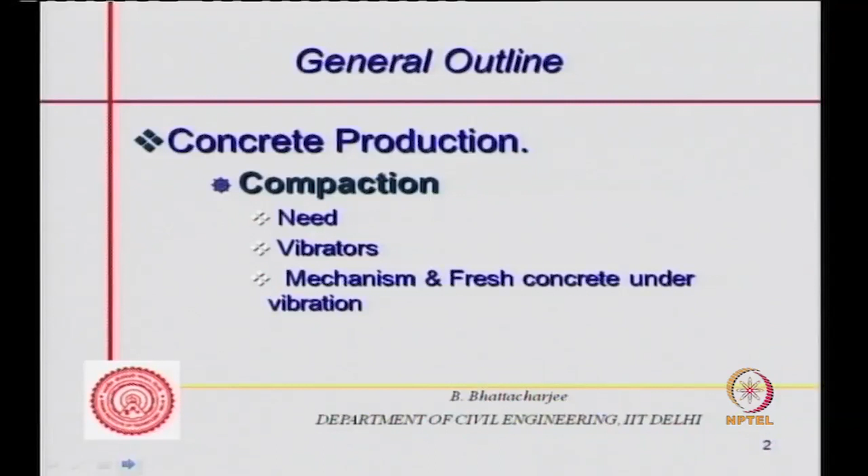So far, we have looked into issues of fresh concrete and the production process. In this last lecture of the module, we look at two important aspects of handling fresh concrete: compaction and curing of concrete. First we talk about compaction - why you need it at all. Then generally we use vibrators, so something about the vibrators themselves. Then the mechanism of fresh concrete under vibration, since we have discussed quite a bit of it elsewhere earlier. Then we'll talk about execution of vibration again briefly. And lastly, we'll talk about curing, need and method.

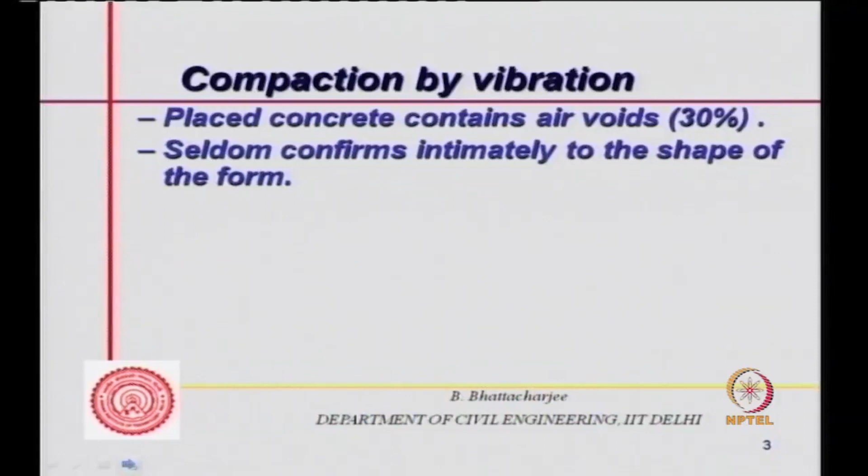So let's talk about compaction, which you usually achieve by vibration. I mentioned earlier that placed concrete contains air voids up to 30%, if it is dry concrete - we are not talking about highly flowing or self-compacting concrete. Also, it seldom conforms to the shape of the form. Therefore compaction is required to drive the entrapped air out, to densify the concrete, and also to increase homogeneity and uniformity. This has other benefits, but largely the entrapped air has to be driven out and concrete must be densified. So that's why we need vibration.

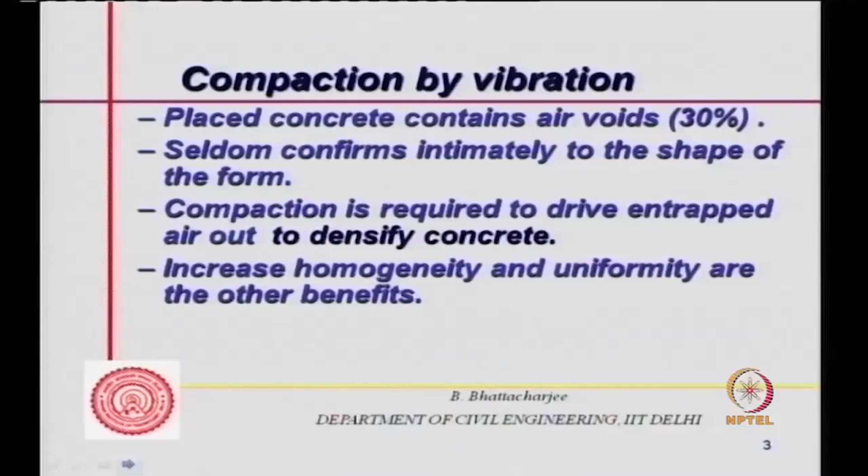This compaction is achieved by vibration, as we mentioned earlier. Energy for compaction is supplied through oscillatory motion of vibration, which is nearly simple harmonic motion. We can measure the frequency of such vibration in air, but it's difficult to measure within concrete, though it's more relevant if we can measure the amplitude of this vibration.

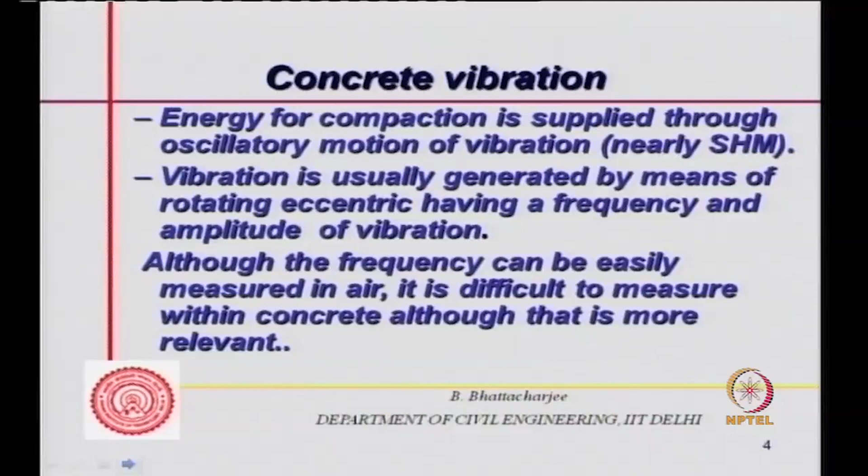So the energy of compaction is supplied through oscillatory motion of vibration, generated by means of a rotating eccentric having a frequency and amplitude. Essentially all types of vibrators, in some kind, are basically a moving eccentric having frequency and amplitude that generates the vibration, and this oscillatory simple harmonic motion causes air to drive out. We'll look into the mechanism. We can determine the frequency of the vibrating machine in air, but within concrete it's difficult, because of the effect of damping and other interactions between the vibrating component and the concrete.

We generally have two types of vibrator classification: internal vibrator and external vibrator. Internal vibrators themselves are classified into three types. We will not discuss all of them since it's not a course on machines, but the most commonly used internal vibrator is the flexible shaft type. The other one is a vibrating machine where the motor is handheld, and power is transmitted straight away to the vibrating component.

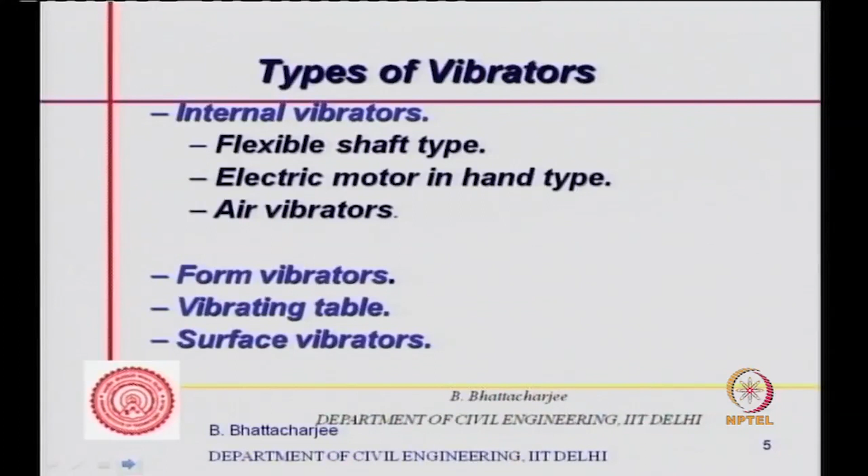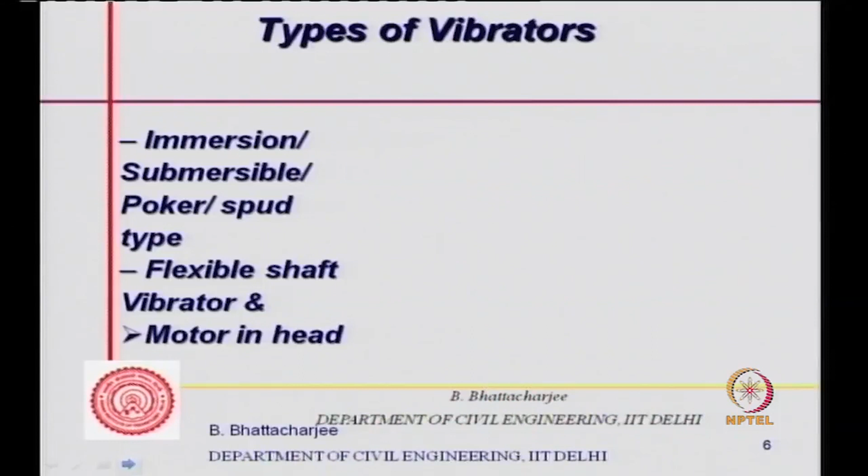So let us see what they are. There are surface vibrators used for floors, vibrating screeds etc., for floors or flat surfaces like slabs. The immersion type is the most common vibrator, also called immersion vibrator, submersible poker, or spud type. They have a flexible shaft, and there's also the motor-in-head type. Let us see quickly how they look - there are three types.

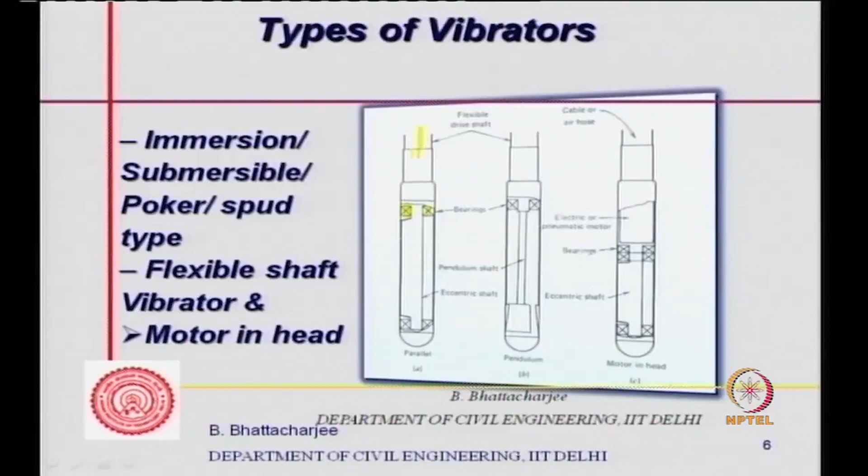For example, you can have a bearing here, and a flexible drive shaft, which is normally a spring that can rotate. The shaft itself is a spring that rotates, connected to a motor, with bearings, and then there's the eccentric mass or eccentric shaft. There's a bearing here, and this rotates eccentrically, causing circular oscillatory motion, and the concrete surrounding it is subjected to this oscillatory motion of the vibrator, which pushes the concrete somewhat and then releases it. So there's a kind of compression of the concrete, and then a kind of rarefaction, because this moves in simple harmonic motion. So this is one type.

The second type is the pendulum type, where the mass is here.

The flexible shaft is here, which is actually a spring. It's connected to the bearing, but there's a rod. There is again a pendulum shaft. Now this pendulum shaft is connected to the eccentric mass, and this eccentric mass causes oscillatory motion.

This rotates and causes oscillatory motion of the vibrating needle that is there. So these are also called poker vibrator, needle vibrator. They have all flexible shaft, and here the motor is. Electric or pneumatic motor is straight away here. So motor is here, with cable or hose.

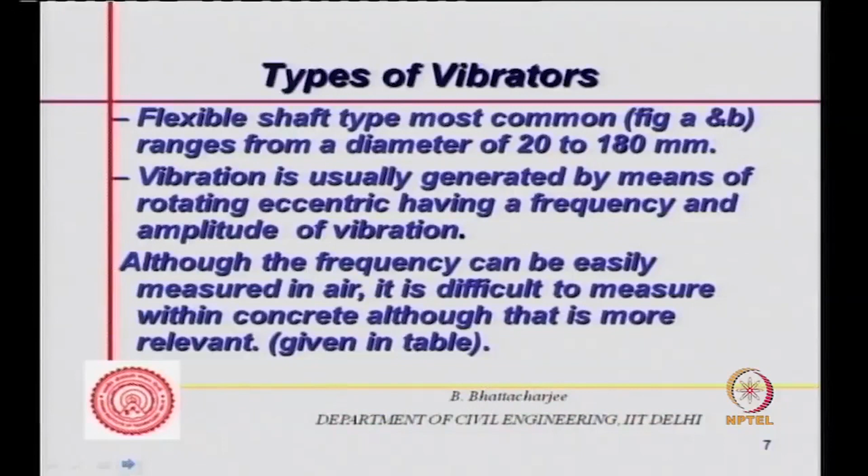This flexible shaft type is the most common, and its diameter can range from 20 millimeters to about 180 millimeters. Usually vibration is generated by means of a rotating eccentric, having frequency and amplitude of vibration, and this data is available.

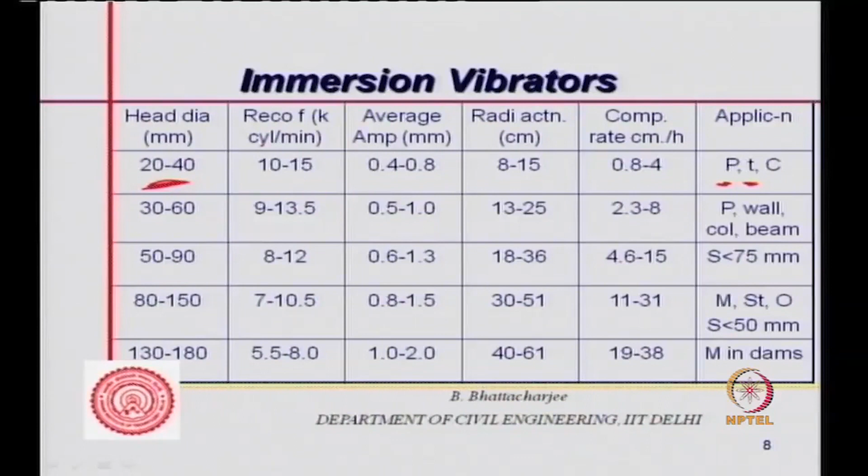So dimensions are from 20 to 80, up to 180. Now we can look at the head diameter of this needle, 20 to 40 mm. Where will you be using this? Plastic concrete, thin section. This will be used in plastic concrete. P stands for plastic, T stands for thin section, and congested reinforcement.

So here I have letters: P stands for plastic, T stands for thin section, and C stands for congested reinforcement.

So you see, thin head diameter 20 to 40 mm. 20 mm is used in thin sections, for example the web of a box section, a thin web about 100 or 150 mm thick, with a lot of reinforcement plus a pre-stressing cable passing through. So it's a thin section. Now the concrete has to be plastic, because if it's dry concrete, you will not be using this.

Now recommended frequency, in kilocycles per minute, is given as 10 to 15,000. And you can see as the diameter increases, frequency reduces. So this is high frequency, this is lower frequency.

Average amplitude is low here, average amplitude is high here. So average amplitude is high, frequency will be low; average amplitude is low, frequency is generally higher. So radius of action is 8 to 15 centimeters. In this one, radius of action is much more.

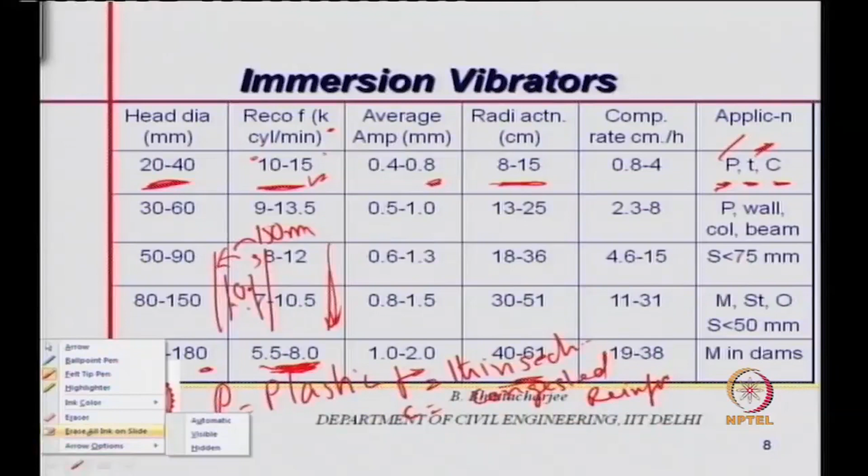So where you have a thin section, plastic concrete, congested reinforcement, you might use this. While this might be used in mass concrete, you can see its radius of operation is quite high, and compaction rate is also fairly high.

So where you have large mass concrete, you want to vibrate it, you might use the massive section type, for example in a dam. M stands for massive concrete, so mass concrete in dams you will be using. In between, if you see 30 to 60, a very common size is about 66 mm. This is very common for slump less than 75 mm, suitable for relatively stiff concrete, not very stiff.

This is absolutely plastic, maybe 100 mm slump or less, just below pumpable concrete. Pumpable concrete is quite flowing, but if you are compacting pumpable concrete, then it should be used. You can use this also, but in thin section or larger section, of course, you can use this one.

For plastic concrete, wall, column, beam, you can use 30 to 60, and as you see, this range reduces here to 10 to 15, 9 to 13.5, and so on. Average amplitude increases along this direction, radius of action increases along this direction, and compaction rate also increases along this direction. So 80 to 150 you will be using in mass concrete, with slump less than 50 mm, on relatively drier concrete.

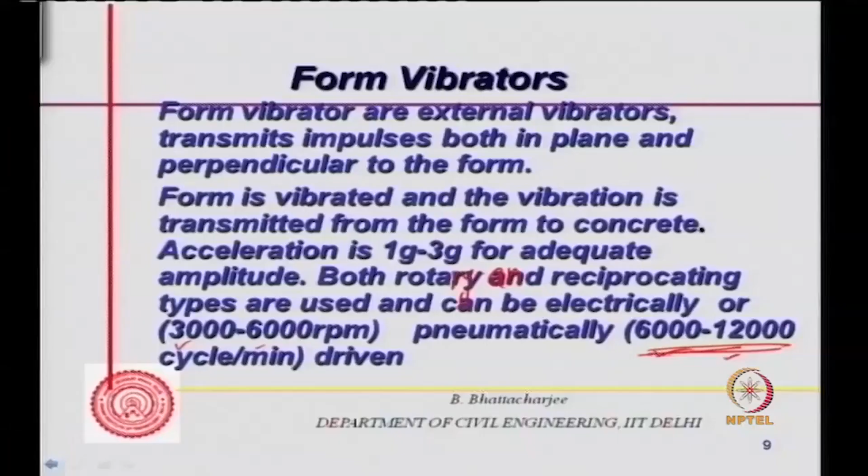This is form vibrators. Quite often we use them in thin sections where we can't use poker or needle vibrators, or they are used together with needle vibrators. So form vibrators are used in thin sections, but it's not the best thing - definitely not the best kind of vibrator, because some of the energy will be lost in vibrating the form itself. Needle vibrator does a much better job because it's an internal vibrator and goes inside to compact the concrete. Also, the vibration from a form vibrator will be limited up to a certain depth from the form only.

The other kind of vibrator, the table vibrator or vibrating table, is usually used for precast elements or in laboratories. Frequency is less than 6000 RPM, vibrations per minute, and amplitude is greater than 0.12 millimeter. So for precast elements, one can use this.

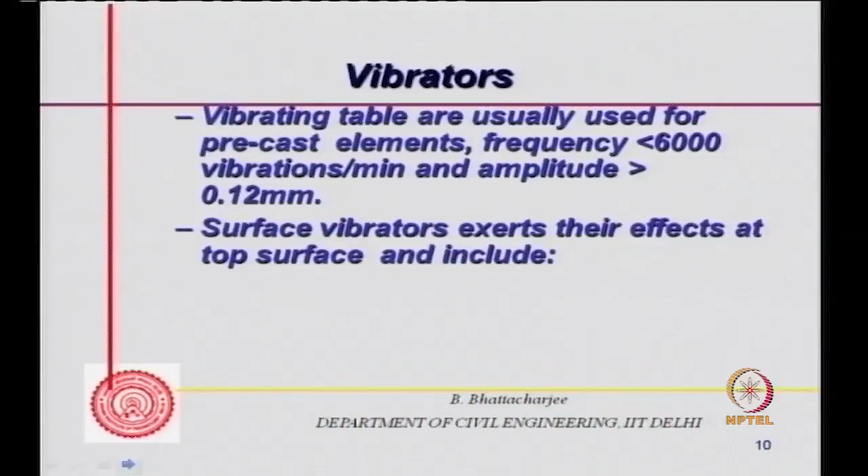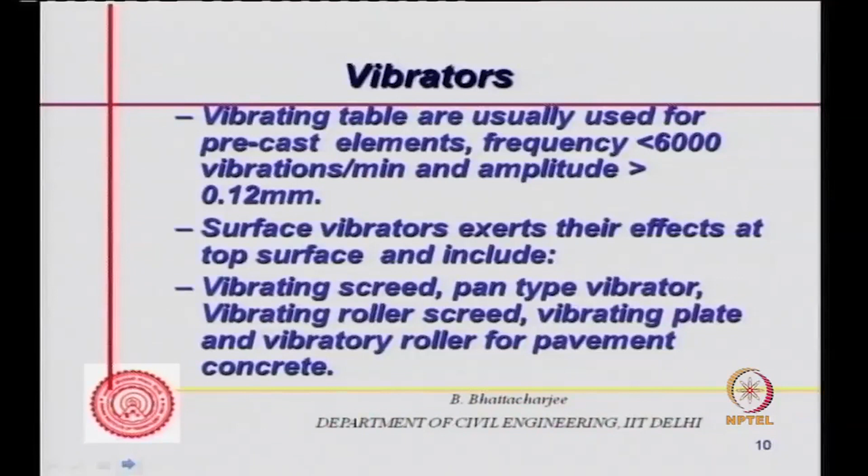Surface vibrators exert their effects at the top surface and include the vibrating screed, pan type vibrator, vibrating roller screed, vibrating plate, and vibratory roller for pavement concrete. So they have their specific use for these surface vibrators.

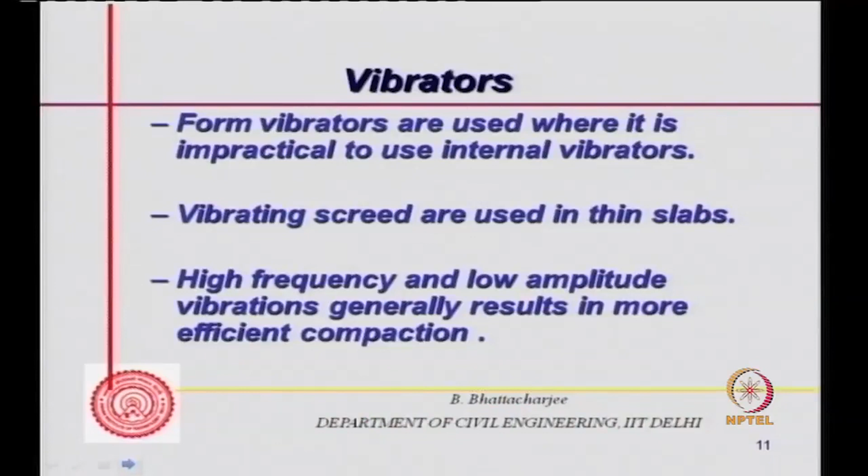So we have seen where we select the needle vibrator and of what dimension. Now we can look into form vibrators - where do we select them? Where it's impractical to use internal vibrators, or it might be supplementing the internal vibrators. Vibrating screeds are used in thin slabs. High frequency and low amplitude vibration generally results in more efficient compaction. The thinnest needle vibrator is actually most effective, but its radius is also low, so your effort in moving this will be relatively high.

How does fresh concrete behave under vibration? Let us see.

As we said, prior to compaction, concrete is a mass of separate particles coated with mortar, held in a pile by an arching action of coarser particles. If you can recall, it will be something like particles of different sizes and shapes heaped up together, with mortar in between - it's like a pile of material with mortar in between. So the red is the mortar, black is the aggregates. I have drawn it with spherical aggregates, though they need not be so.

So the mortar should be somewhere there. It remains like a heap - mortar held in pile by arching action of the coarser particles. Basically there will be arching action, one particle supports the other.

This actually should be able to move and get the shape of the mold. So what you have to do? You have to see that this particle moves downward, this particle moves downward, and get the shape of the mold itself.

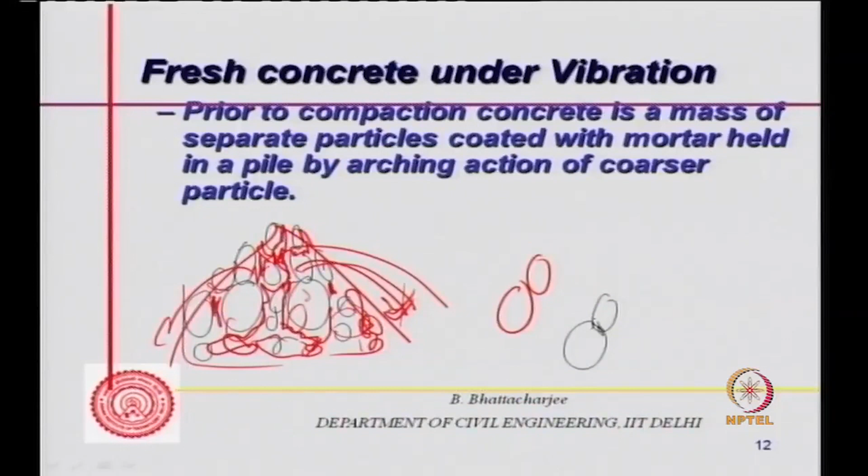So arching action of this one actually holds the particle because one particle is touching the other, by friction. So by the friction, they are just in position. Their fall due to gravity is restricted or obstructed by the friction between the particles. So you have to overcome this friction. And how do you overcome this friction?

The arching is a result of friction between aggregate particles, and surface tension or cohesive forces of cement paste. Since the paste is in liquid or plastic state, there's some surface tension and cohesive forces that also hold the particulate system in position in the heap. Now you've got to overcome this.

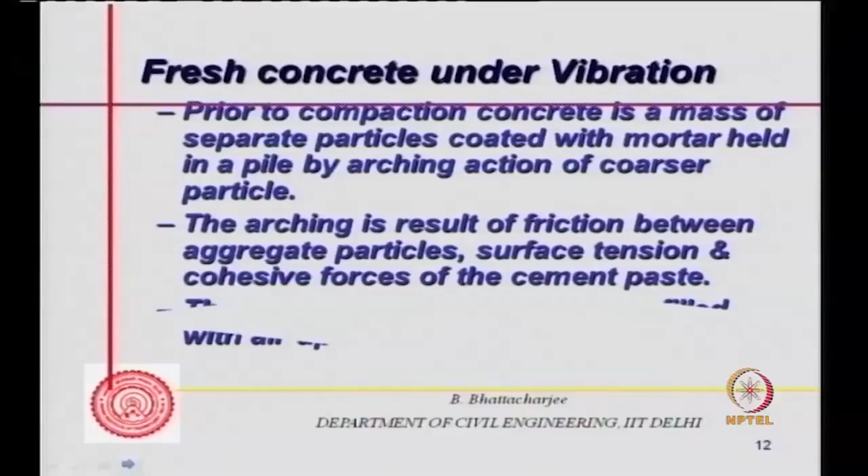So this arching actually results in a void of air of about 30%, because the particles are arranged like this, and there is mortar in between, but there will be air gap in between - about 30% air gap will exist, and you've got to drive this air out.

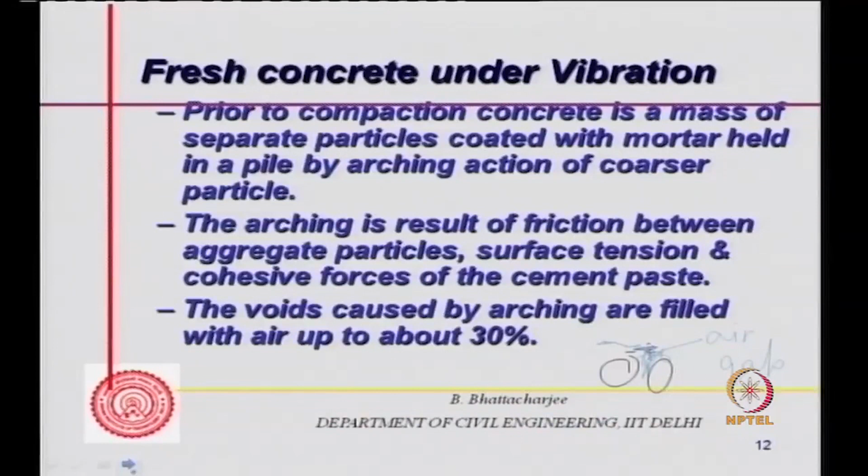That is the idea of vibration. Vibratory impulse actually liquefies the mortar portion of concrete, and thus reduces the internal friction, resulting in consolidation by force of gravity. Then once the concrete is vibrated completely, the friction is re-established and cohesion is restored and strength increases.

Now, how does it occur? Vibratory impulse essentially causes the water in the cementitious system or paste system to vibrate more, moving more than the solid particles, and the more constricted the necks are, it will exert more pressure, and this pressure overcomes the friction, resulting in a kind of collapse of the system.

So the velocity of compression waves generated could be of the order of around 45 meters per second in the beginning of vibration, increasing to 240 meters per second at the end. So essentially liquefaction of the mortar occurs.

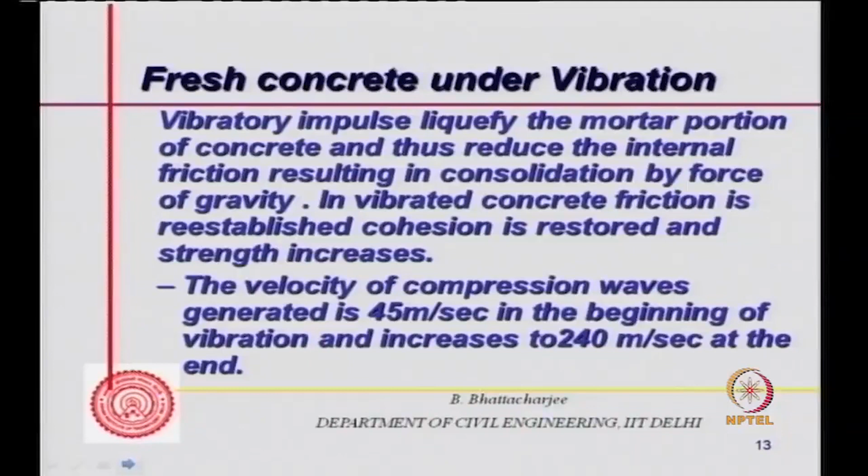That's because the water within the pore system would vibrate more or move more than the solid particles and cause an excess pressure in the system, which reduces or overcomes the friction within the particulate system, resulting in mobility or movement of the particle, and also drives out the air.

For 200 hertz, this corresponds to a wavelength of the order of around 0.2 meter to about 1.2 meter. The waves move water more than the solids, and generate hydraulic pressure within the interstitial water-filled spaces. This pressure is maximum in the most constricted space, and causes reduced internal friction, giving the paste temporary fluidity.

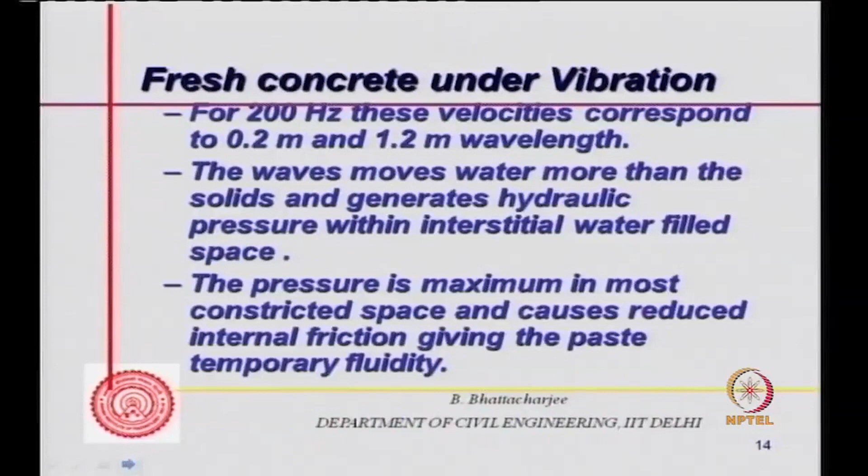So this water within the constricted space, because of the movement, exerts pressure, and that overcomes the friction, and that's how the particle moves.

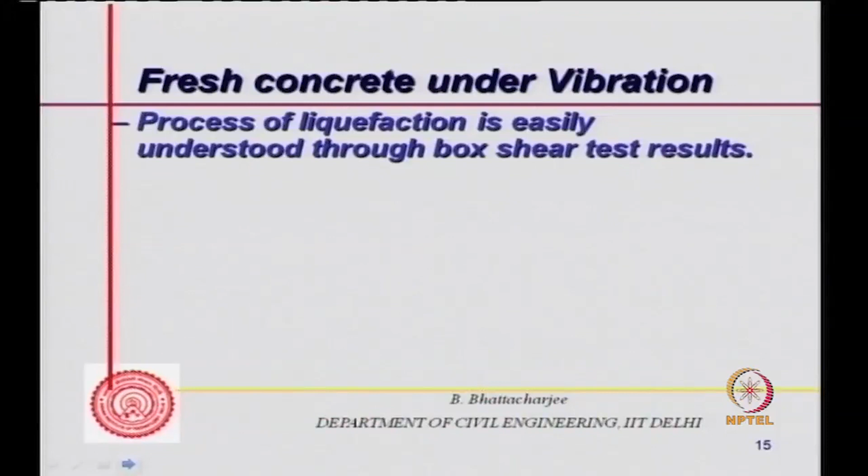The process of liquefaction is easily understood through the box shear test, which we normally do in soil. This kind of test was also conducted in concrete long back, and one would see something of this kind.

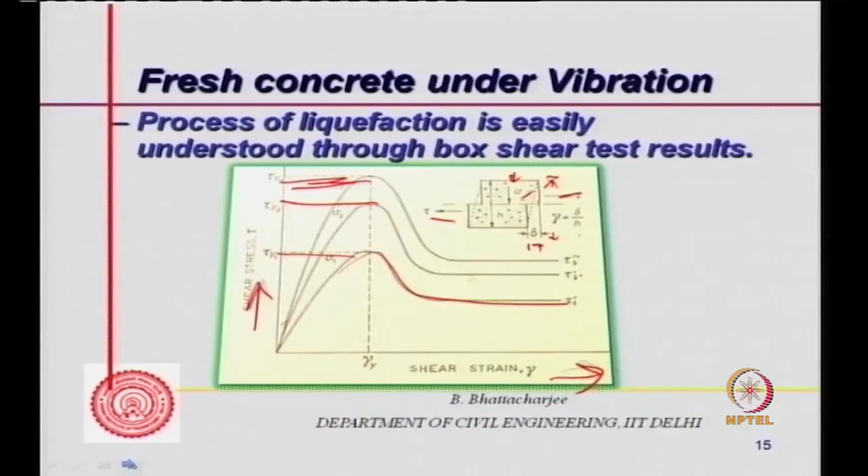As you increase the normal force, the yield shear stress actually increases. Concrete researchers have done box shear stress tests, and this is the kind of behavior one would normally see.

What is yield shear stress? That was shown in the previous diagram. Yield shear stress increases with sigma. As sigma increases, yield shear stress increases, and one can linearly relate this.

This is tau 0 at zero normal stress, and this corresponds to the tensile strength of the whole thing, the normal tensile strength. So mu is this slope, and sigma is the normal stress. Now mu equals tan phi, where phi is the angle of repose. So mu equals tan phi, the angle of repose. This we know in soil.

Drier concrete almost behaves like soil, and people have studied this. This is the shear stress strain relationship before vibration, if one measures it.

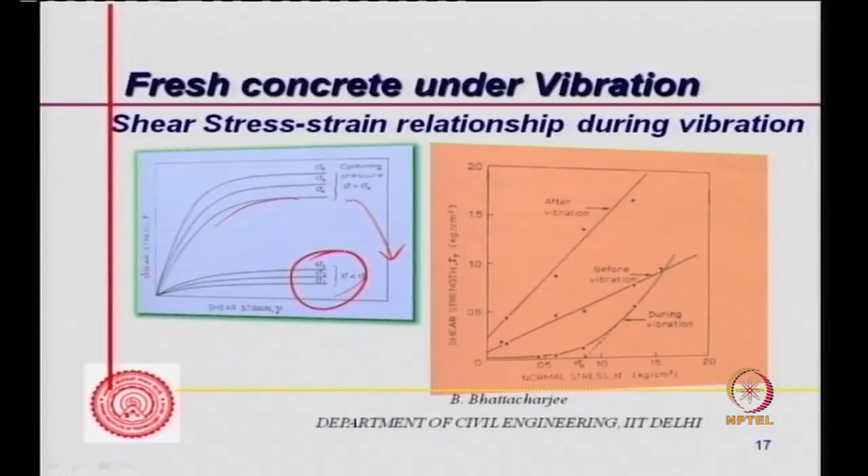During vibration, the yield shear stress reduces significantly, and after a certain period of time, tau reduces significantly depending on the sigma value. After an increase in the sigma value, it behaves almost, not exactly parallel, but at some similar value.

So when sigma normal applied is small, the yield shear stress for small sigma n is small. During vibration, it behaves like this. Up to a certain sigma normal value, practically there will be no yield shear stress.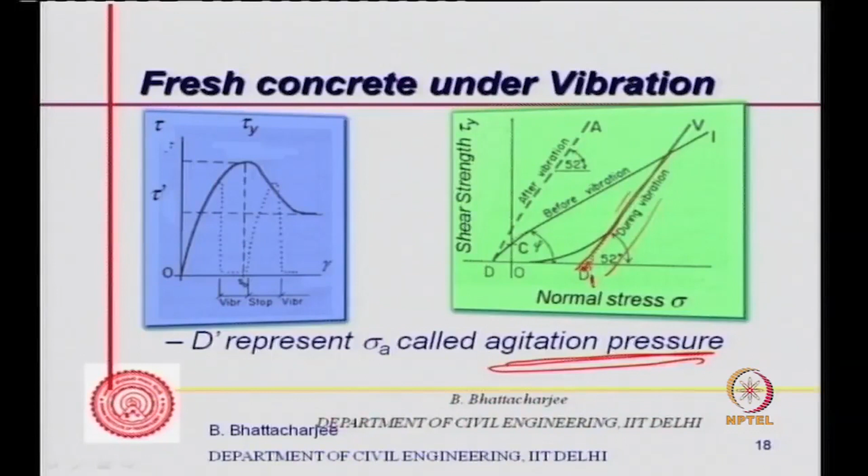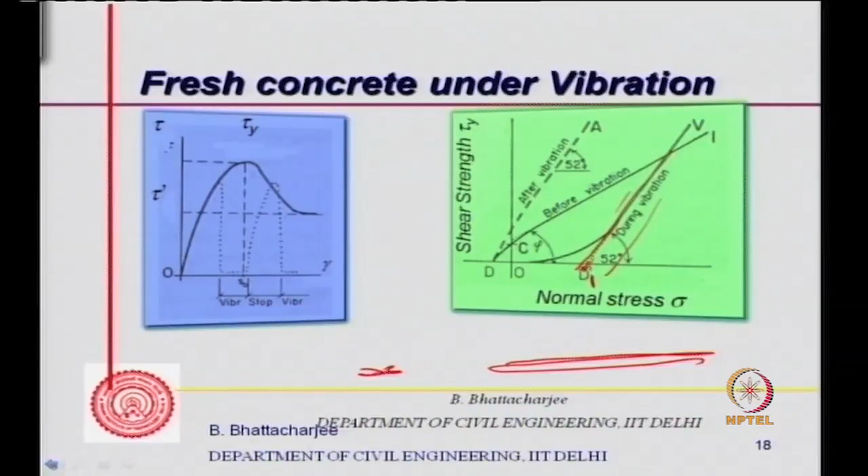If I extend this line, this is the normal stress that will correspond to agitation pressure. So during vibration, it behaves like this. Going back to the earlier diagram, this is the agitation pressure here.

If your normal stress is more than the agitation pressure, only then does the yield stress start increasing. So as a result of vibration, the yield stress reduces significantly, but mu, the slope of this line, is more than the original. After vibration, it stiffens, and the yield shear stress goes back to a higher value.

Once you stop the vibration, the cohesiveness is re-established, and that's how the behavior is. So it would again show up, the strength part of it. The same thing is shown here for during vibration, before vibration, and after vibration.

This angle also increases. This angle is more or less similar, while this angle is less. So tan phi, mu sigma, the tan phi has actually increased, meaning the angle of repose has increased. That means it can stand on its own at a stiffer angle. This diagram also shows this, here before vibration.

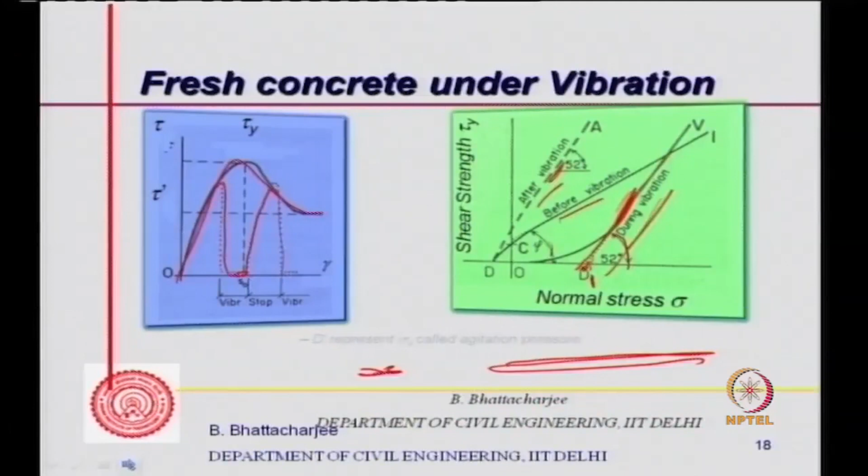During vibration, you start vibrating, yield shear stress comes down very significantly, and then you stop, it re-establishes itself. So basically, when you are vibrating, yield shear stress comes down. Therefore particle can move, shear movement due to the shear force can occur. It can move over each other or slide over each other. Shear flow would be occurring, and due to this the air will be driven out, and it can get the right kind of shape of the mold itself. So that's the mechanism of vibration.

Fresh concrete consolidation occurs in two phases. In the first stage, vertical settlement of coarse aggregate takes place in a manner similar to packing of granular material, and shape of the aggregate plays a major role. Air voids up to 5% remain after this. Spherical particles will easily roll over, and therefore in the first stage itself, vertical settlement becomes easier for rounded aggregate.

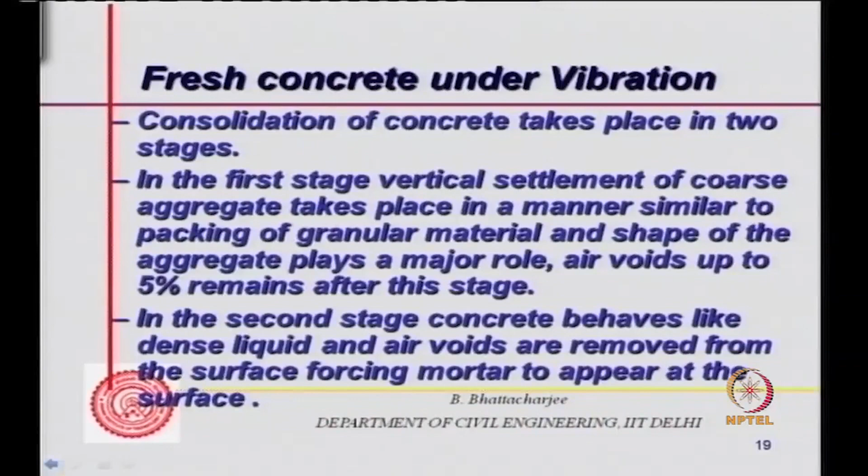At the end of the second stage, concrete behaves like a dense liquid because the air voids have been removed quite a bit, and finally air voids are removed from the surface, forcing mortar to appear at the surface. So this is important to understand: once the air voids move out, the mortar will appear at the surface.

So once the first phase is over, in the second phase the mortar will come out, and that's also a test for whether the vibration is complete or not. You'll find that a slurry or mortar phase is coming out at the top, and then you can stop vibration.

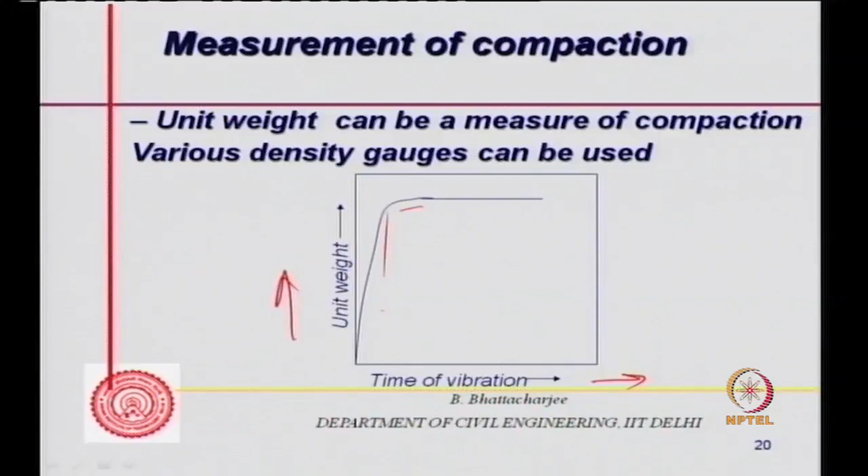One can measure the unit weight by various density gauges, and they typically look like this: unit weight versus time of vibration. So after a certain period of time, vibration is complete. In fact, somewhere here the mortar would have come out right at the top, and after that you need not look into any further, the vibration is over.

What you shouldn't do with respect to vibration: this is the correct type, this is incorrect. Needle vibrator should not be penetrated at an angle. This is incorrect, this is correct, because at an angle they will be dragging the concrete along that direction. So by and large, it should be vertically put down.

And if it is on a slope surface, it should be done from here, the concrete is over, so you place it here, and do from the bottom and go upward. So it is desirable that one does vibrating vertically downward without the inclination of the needle. It is not desirable to incline the needle and do it. And one should not push the concrete by vibration like this being done here. So that's some do's and don'ts with respect to vibration.

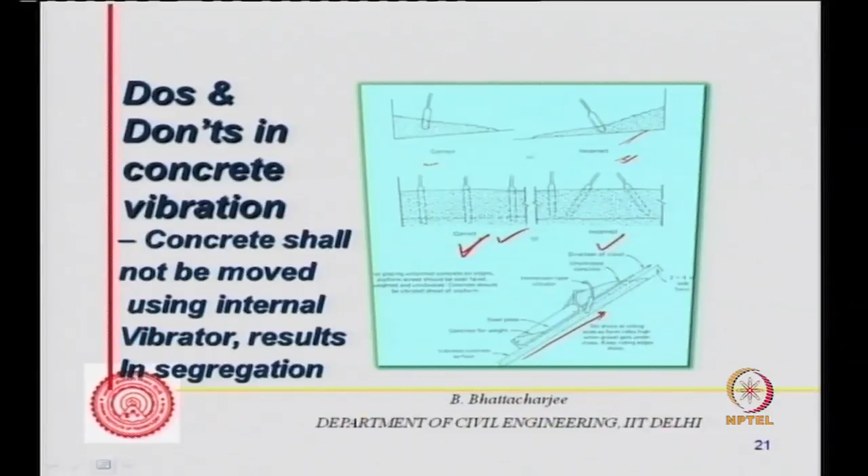It should not be moved using internal vibrator, which can result in segregation. That means penetrate vertically to sufficiently embed in the concrete, hold stationary, and remove slowly, say 7.5 centimeter per second is a good, slow velocity, but one may not be measuring them. The idea is that when you are taking out the vibrator, it should be taken out slowly.

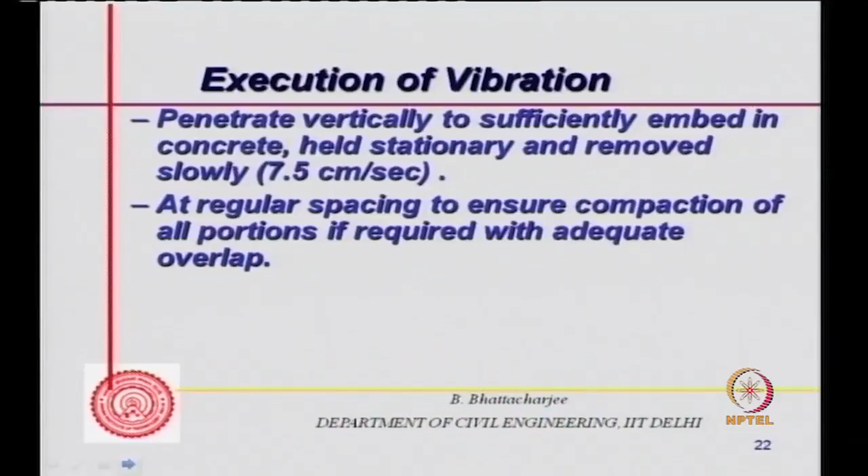It should be done at regular spacing to ensure compaction of all portions with adequate overlap. There should be adequate overlap. Typically it should be like this: if this is the radius of action, which is known for the types of needle we talked about, the second needle location will be here so that there is the right kind of overlap. So overlap should be like this.

In other words, if I have sections like this where one circle covers it, or for a thinner section it covers maybe something like this, the next one should be something like this, and so on, so that overlap is here, and the next one should be something like this. So there should be sufficient overlap, that's the idea. No portion should be left blank.

Minimum usually 10 seconds is necessary for complete compaction. Vibration time needed is given by some equation, but I am not talking about that because nobody is going to use it much. But we understand that at least 10 seconds if you keep it, and when you see the mortar has come out, you pick up the needle vibrator, lift it up slowly at a very slow velocity, and you can see the slurry right at the top.

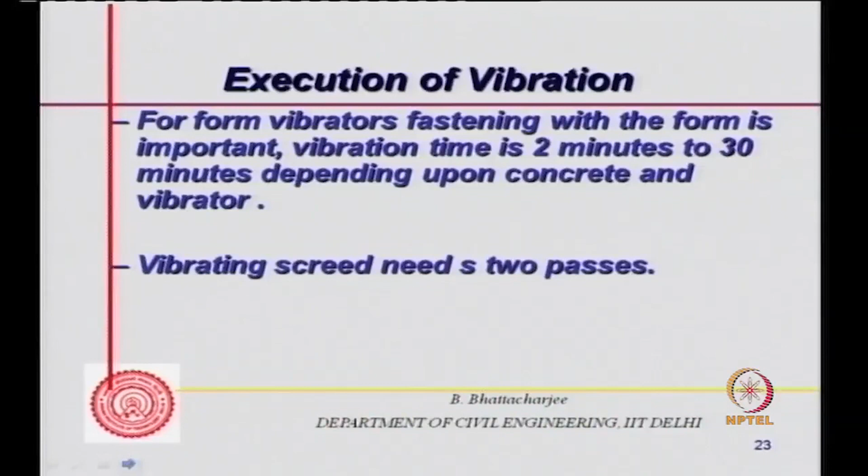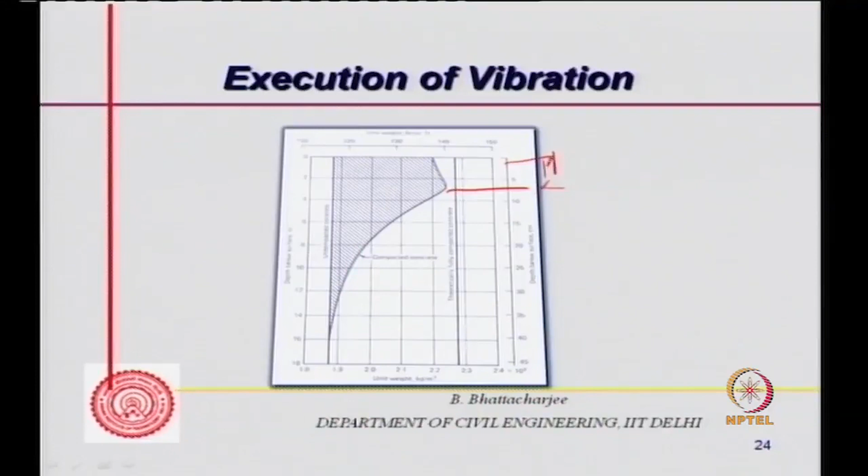The degree of vibration achieved by a surface vibrator can be seen from the figure. Actually, it only reaches a certain depth, about 8-10 centimeters from the top, which means 80 mm, and not really much. After that, the density reduces. So only the top portion can actually be vibrated. Similarly, a shutter vibrator also will not penetrate throughout the section if the section is thick.

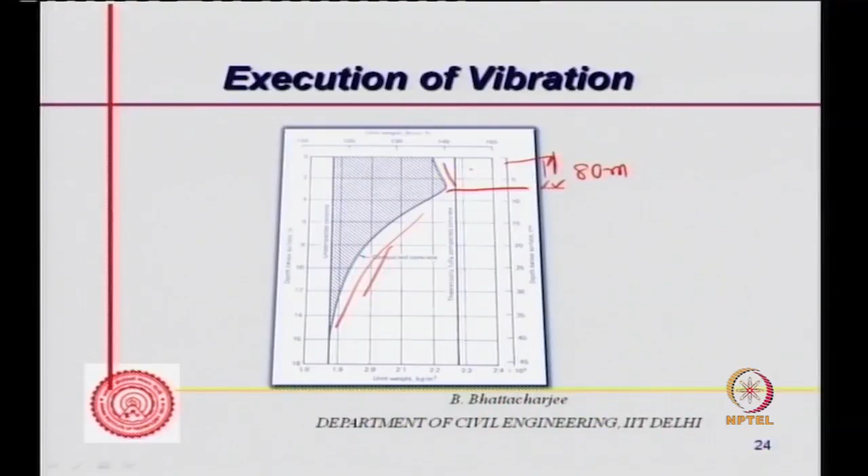Now, imperfections in vibration, like honeycombing, are due to poor vibration. If you have not done the vibration properly, concrete can have stony and air voids. This can generally happen in narrow sections, and grout loss can also cause this if the forms are not joined properly. Free fall, low slump concrete, and poor vibration can result in this.

Blow holes or bug holes, which you see normally in concrete, are small holes that are aesthetically ugly looking. Excess form oil, if you are using, can cause this kind of thing. Lean and low slump concrete, and inadequate vibration, can also cause it. So poor vibration can result in honeycombing, and inadequate vibration can increase bug hole formation. Bug holes are pretty common, not very harmful, but they look ugly.

Not a good finish. Subsidence and cracking can happen due to plastic settlement. This is bleeding concrete - this can occur in concrete which is bleeding, because the water comes up and the solid subsides. Inadequate vibration can result in this. High water content is usually the cause. So in concrete with high water content, you might get short cracks. The cracks look like this, in fact.

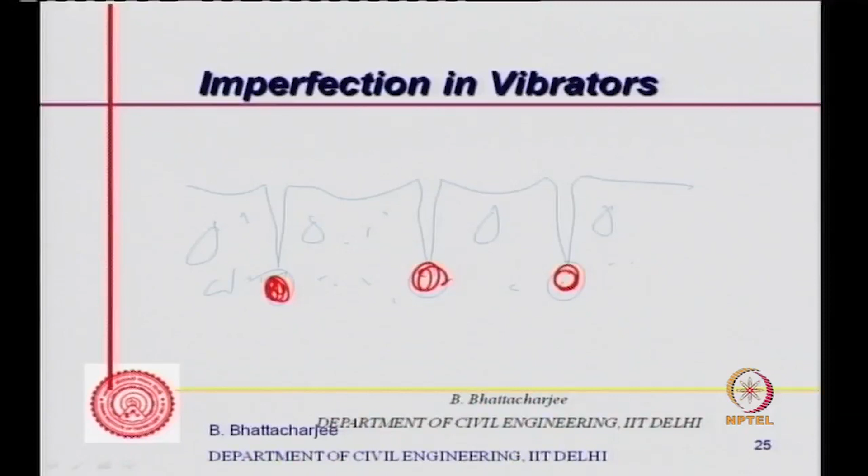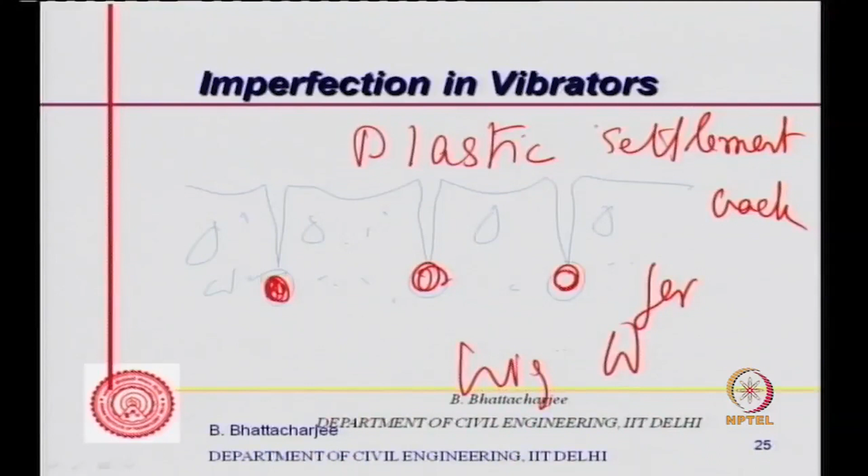You might see them just over the reinforcement bar. So this is a plastic settlement crack. It comes when your water content is too high, and with inadequate vibration. Where you have high water content, if you have done inadequate vibration, you might still get this.

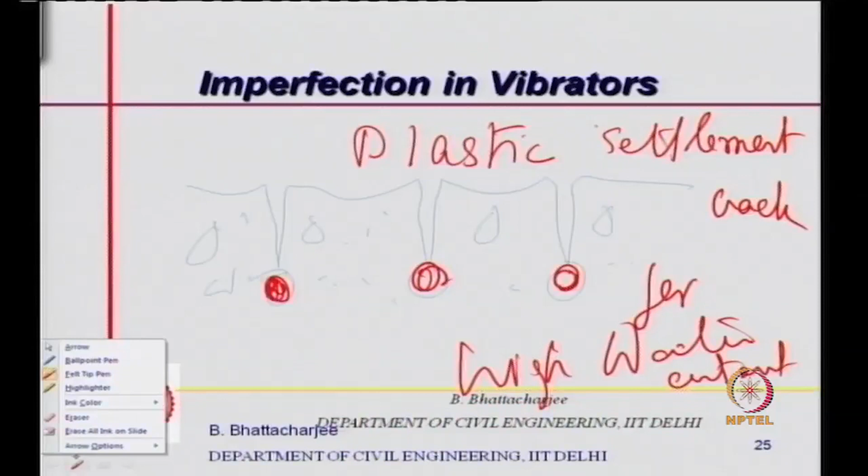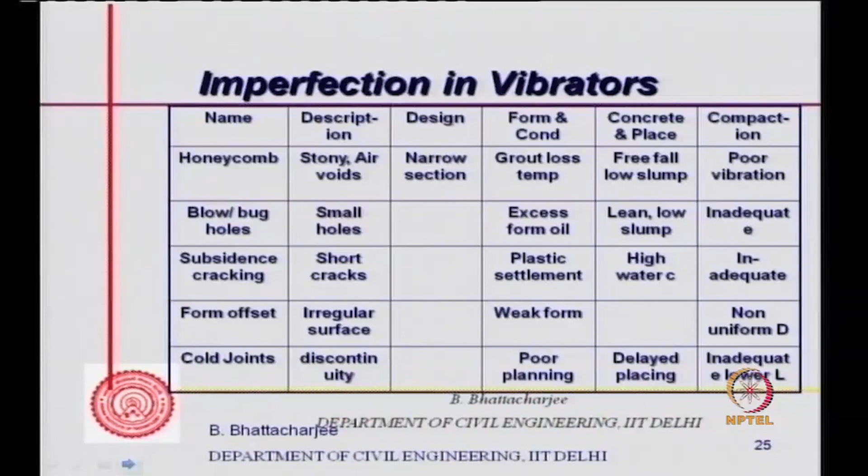In fact, inadequate vibration is also a cause, not the primary cause, but it's also a cause. Form offset, of course, has nothing to do with vibration - if your forms have not been bolted properly, this can result in defects. Cold joint formation is also due to inadequate vibration of the lower level. A cold joint occurs when you have old concrete, and then new concrete over here. This can happen, and if it is inadequately vibrated, you might get cracks coming in, or a weak joint forming, if it is not vibrated properly.

These are the defects which can result from imperfections in vibration. Special vibrations include vacuum vibration. Revibration can be done as long as the internal vibrator sinks into the concrete, with a penetration resistance of around 3.5 MPa. Penetration resistance is a measure of setting, and it should be 3.5 MPa - if it is more than that, you cannot use it.

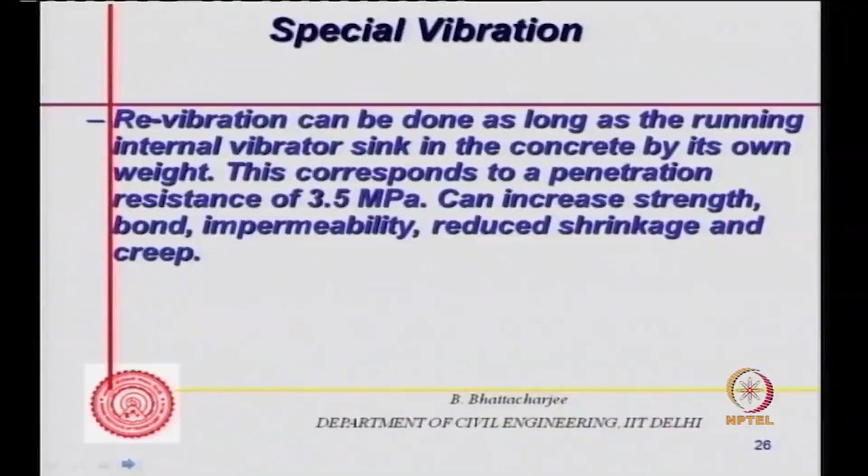Revibration can increase strength, bond, impermeability, reduce shrinkage and creep. So revibration is not undesirable, but you can do it as long as the concrete is not set, measured by penetration resistance. Vacuum vibration is accomplished by applying vacuum to the surface of fresh concrete. Cement paste is densified by removal of air from the surface and water from a certain depth. This is applied for vacuum dewatered concrete flooring requiring high abrasion resistance, like warehouse or industrial flooring, where you are likely to have a lot of abrasion. Basically water that was used for placing the concrete is removed, so the water cement ratio is lowered and you get relatively stronger concrete.

Vacuum dewatering involves placing concrete with higher water content, then extracting the extra water. Strength is improved; it's commonly used for slabs and walls, with vacuum between 30 to 50 centimeters of mercury applied by means of special liners of material which allow water to come out while retaining the solids.

You have a mat placed on top of the concrete, and then water is evacuated out through the vacuum. It should be applied as early as possible. Penetration of vacuum is up to about 30 centimeters, and it is less efficient in air-entrained concrete because then air will come out.

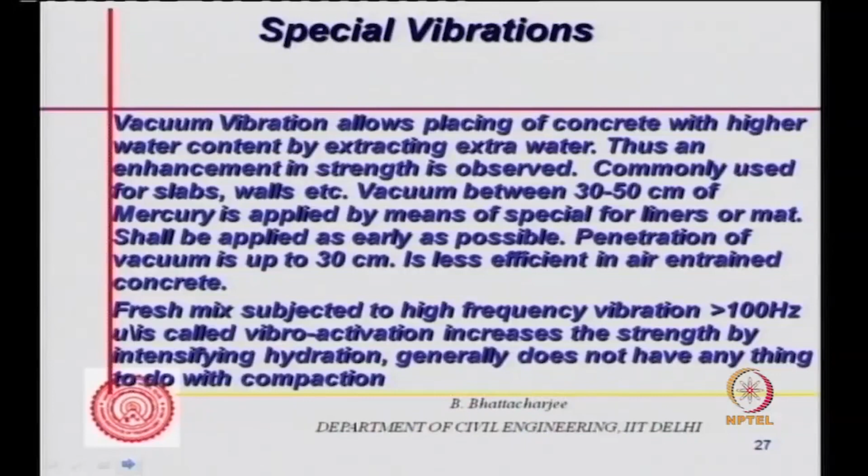Fresh mix subjected to high frequency vibration over 100 Hz is called vibro activation. It increases the strength by intensifying hydration, and generally has nothing to do with compaction. So if you use high frequency vibration, the hydration process increases, but it has nothing to do with compaction. Right, so these are special cases.

Now let's look into the second part of our discussion, that is curing. Hydration reaction is not instantaneous, not like an explosion reaction. It occurs over a long period of time, and therefore water must be available for hydration. For hydration to continue, you need a relative humidity of 100%.

Besides, there will be loss of water by evaporation, and this shall be prevented. If you can't prevent it, it should be replenished. Then some water will be consumed by the chemical reaction itself, what we call self-desiccation, and this also needs to be replenished. So essentially, the reaction requires a longer period of time and occurs only at 100% RH, so you must maintain 100% RH. Water loss by evaporation occurs and has to be replenished to maintain 100% RH. Self-desiccation also causes some water loss, which should also be replenished. Also, sometimes you need to maintain a conducive temperature.

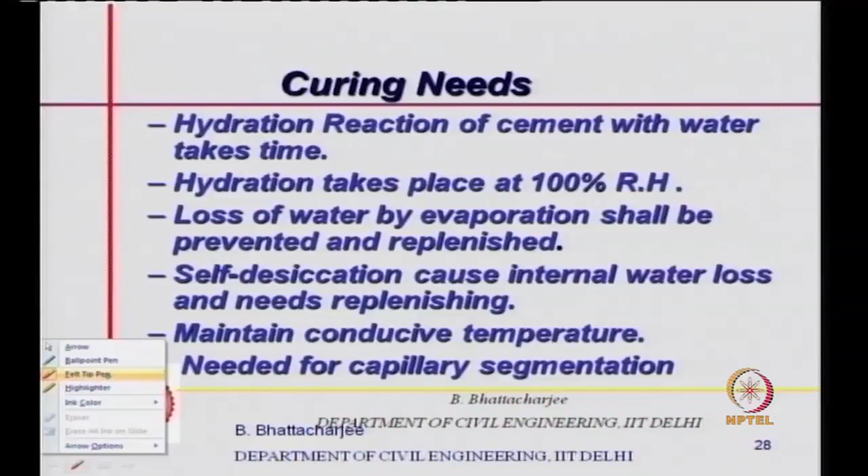So this is the purpose of curing, the need for curing. Most important is, if you have inadequate hydration occurring, the capillary pores in the system, which we have discussed earlier, between cement hydrates and outer product etc., you will have an unhydrated cement system.

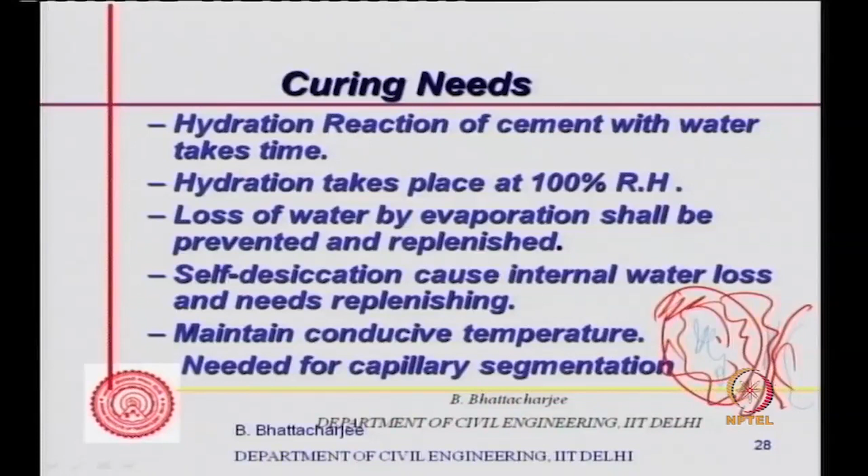Unhydrated cement is somewhere there, and then there will be capillary pores, interconnected capillary pores in between. These capillary pores, which we have discussed earlier, need to be segmented. Only when you have sufficient hydration product will they come and touch each other from both sides, and the capillary will get segmented. So minimum curing is required to ensure that capillary gets segmented.

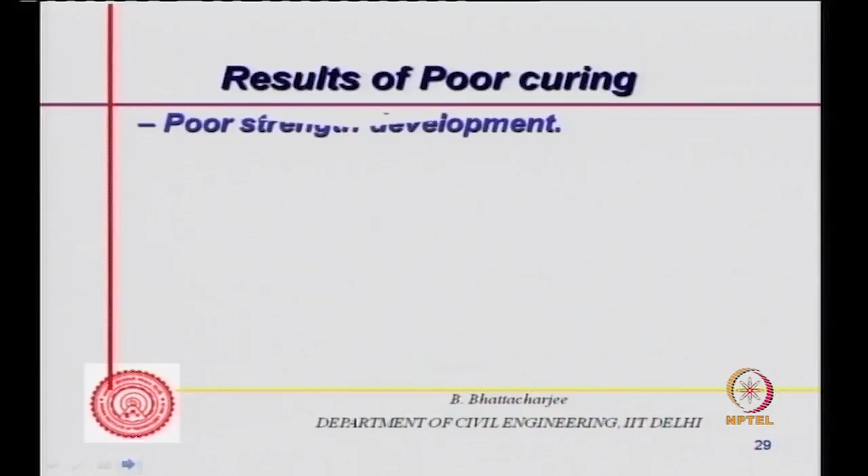Otherwise, unsegmented capillary will result in poor durability of concrete. So if you have not done good curing, what will happen? Obviously strength development would not occur because hydration has not happened. A lot of pore space will remain, and drying shrinkage can result because the water has gone out, which can cause cracks. This may be aggravated by high ambient temperature and low relative humidity. Poorly segmented capillary results in lower durability of concrete.

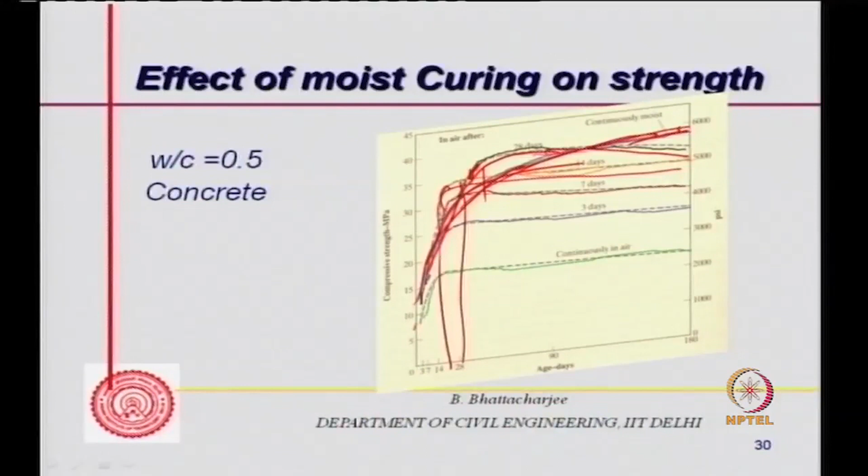Continuously moist cured, it will go like this. Continuously in air, of course, strength development will be much less with time—up to 3 days there will be a slight increase, then little more after 3 days. So what happens is, when you stop curing, hydration proceeds for a little while, and after that there is no further strength development. So therefore, I need strength development.

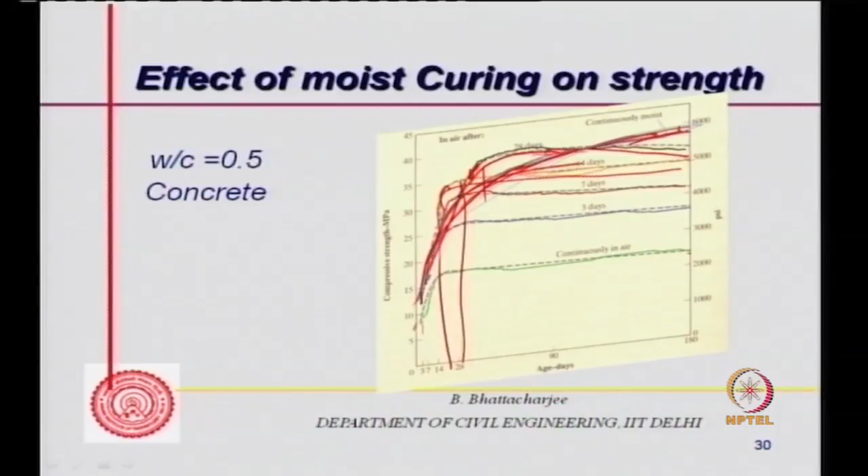Compressive strength is a function of curing age. If I continuously moist cure it, this is what I get—it increases significantly, continuously going on increasing. So that's what it is. For strength gain, I need some amount of minimum curing. The more moist curing I do, the more strength I will gain this way. Methods of curing—obviously water curing is number one.

Ponding, spraying, that's how you do it. If it is a slab, concrete is here, so you make some sort of a barrier on both sides and simply do ponding, water here. So these slabs you can actually do ponding. Ponding can be done on slab.

Spray with any kind of pipe, then cover with wet sand. Instead of ponding, you can just put sand particles, and this has to be maintained wet, or you put wet Hessian clothes or absorbent covering. This could be for slab or for columns also. For a column, you can put wet Hessian clothes here, which will remain wet all the time, with some kind of absorbent covering. So this is one - moist curing is done in this manner.

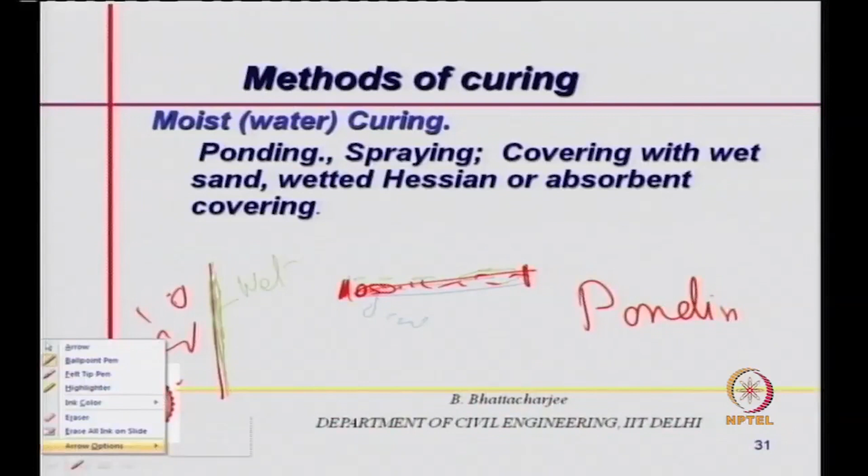Then you have form retention and covering concrete prior to setting. Of course, you can retain the form, but that will not be replenishing the water, or cover the concrete prior to full setting or even after that. So water will not go away, but at the same time, it will not replenish the water.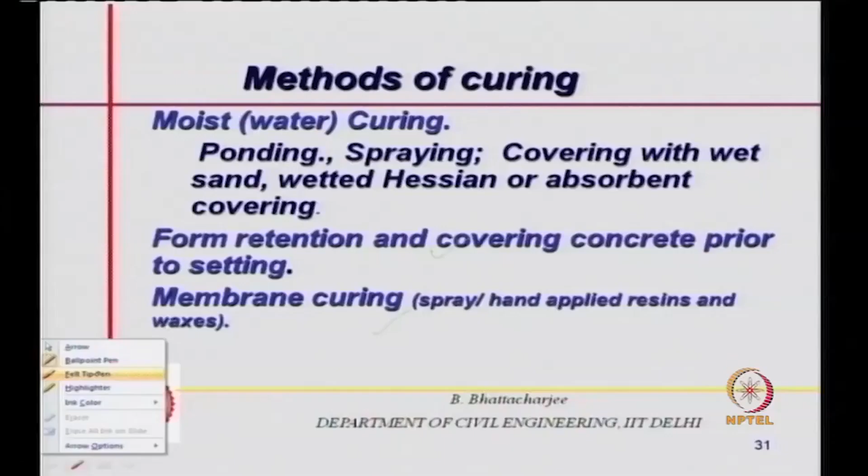Membrane curing - basically you apply resins and waxes on top of the concrete to form a membrane. It can be sprayed or hand brush applied. So what it does is ensure no water goes out; whatever water is inside is used up, so no evaporation. Both this method and the previous one ensure there is no loss of water, but they will not replenish the self-desiccation water. So these are the methods.

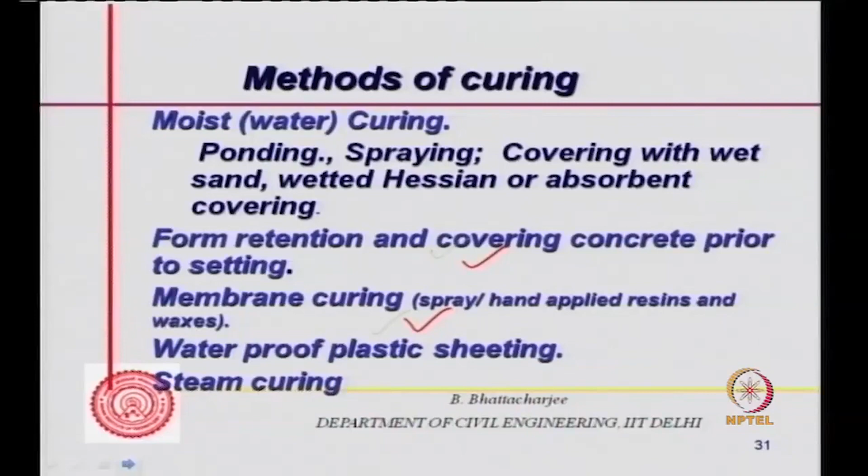Then you have steam curing. Waterproof plastic sheeting some people have used, and steam curing. Steam curing is used where you want accelerated strength - maybe you're doing pre-stressing and want to do it quickly, and that's where you use this.

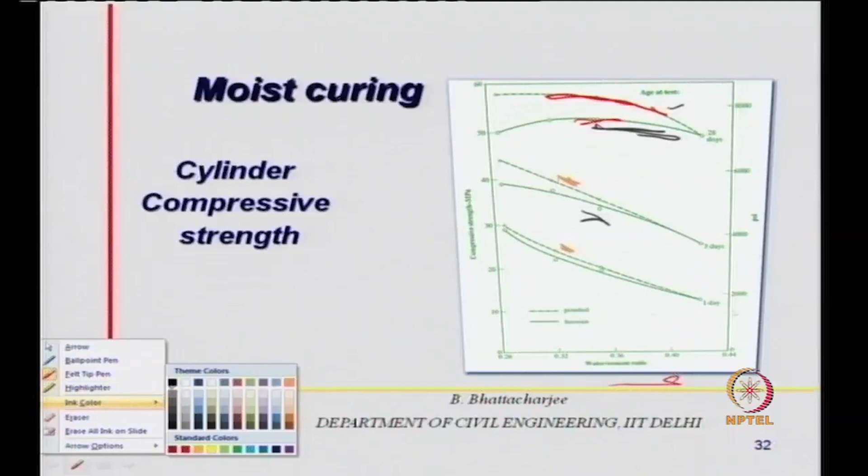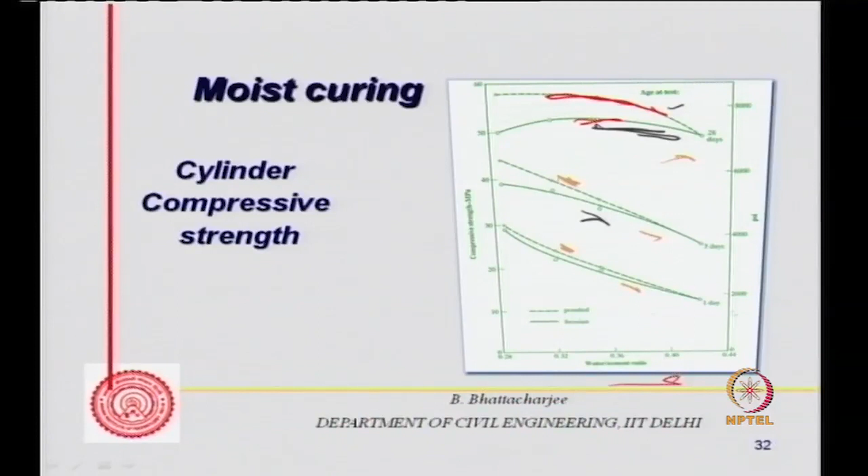Moist curing - if you see compressive strength, you can compare it for 28 days for different water cement ratios. The comparison is ponded versus Hessian. This high one is ponded, this is Hessian cloth here and there. So ponding does a better job, ponding is here, and Hessian is relatively lower. This is for 1 day, this for 7 days, this for 28 days. So ponding does a better job than Hessian or putting a water absorbing cloth covered.

Water absorbing cloth or something covered - cylinder strength, basically what we want to see is qualitative, because quantitative values don't make much sense, it varies from concrete to concrete. So Hessian, ponding is a good thing when you have the facility and also the possibility of doing it. For example, you can do ponding on slabs or horizontal members, particularly large horizontal members, but you can't do it on columns.

Curing by formwork covering membrane, of course, stops evaporation, which I said, but does not replenish the moisture loss due to self-desiccation. That's a problem.

Now, you need a minimum number of days of curing for segmentation of the capillary, and it depends upon the water cement ratio. For example, water cement ratio 0.4 is just 3 days, and for water cement ratio 0.7, it may take 1 year. So higher the water cement ratio, more days are required to segment the capillaries. This is understandable, because higher water cement ratio means larger capillary pores and more of them, and they will be more connected.

They are beyond the percolation threshold, so all of them will be connected. So codes actually specify minimum curing days based on this. For example, the Indian code says 7 days minimum curing is required for ordinary Portland cement, but if it is pozzolana blended, then you need 10 days in normal weather, and correspondingly 14 days in dry weather like desert areas where it's more dry - there you require 14 days with pozzolana blended cement.

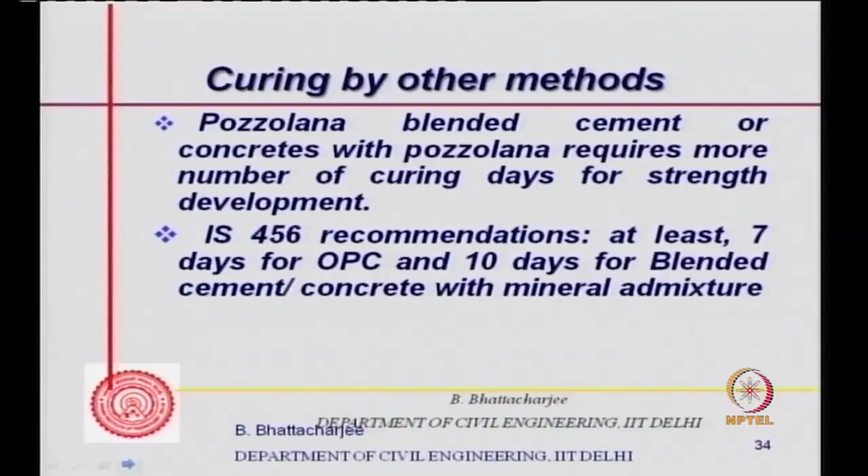But pozzolana blended cement will require more curing days for strength development, because that process is slower. IS 456 recommends at least 7 days curing for OPC, 10 days for blended cement or concrete with mineral admixtures in normal conditions. But for dry and hot conditions, these periods increase to 10 and 14 days.

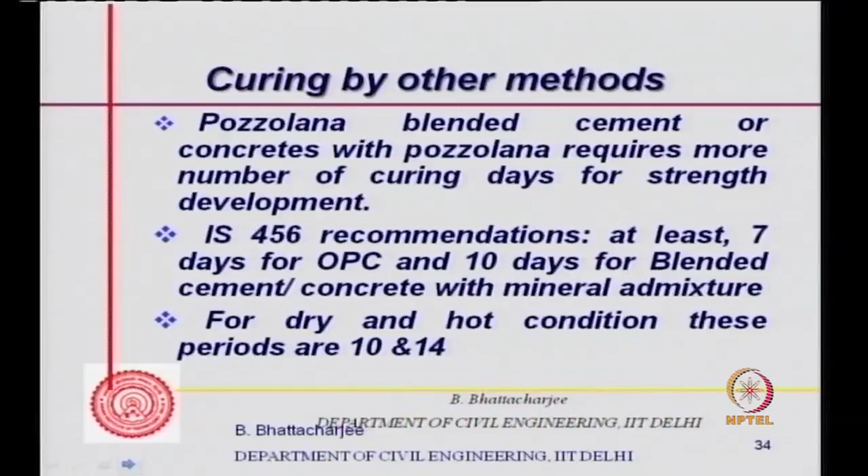Other codes are actually much more elaborate, though I don't have time here to discuss those. Some talk about curing depending on water-cement ratio, evaporation losses, and air velocity. The erstwhile British code, for example, was quite elaborate in this respect. Our code is much simpler. So that's what it is.

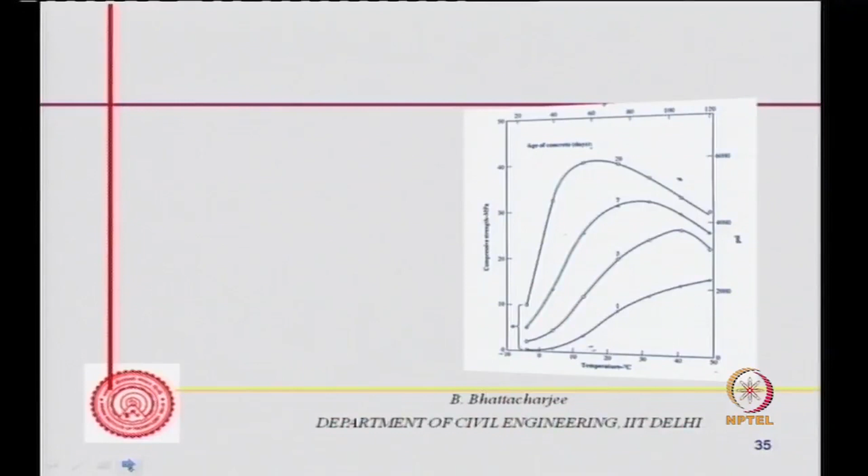What about temperature? Consider concrete cast and cured at an indicated temperature, say 30 degrees centigrade, at 1 day age, up to 28 days. If you cure at 10 degrees centigrade, strength is here; at 20 degrees, strength is here; at 30 degrees, strength reduces; at 40 degrees, strength reduces further. So at 28 days strength, curing at 40 degrees gives less strength than curing at around 20-23 degrees. Similarly for 3 days strength and so on.

So at higher temperature, early strength gain is high - almost close to that. But the later 28 days strength actually reduces. So maximum 28 days strength is obtained at 20 degrees centigrade when casting and curing at the same temperature. Now we talk in terms of something called maturity, the temperature effect.

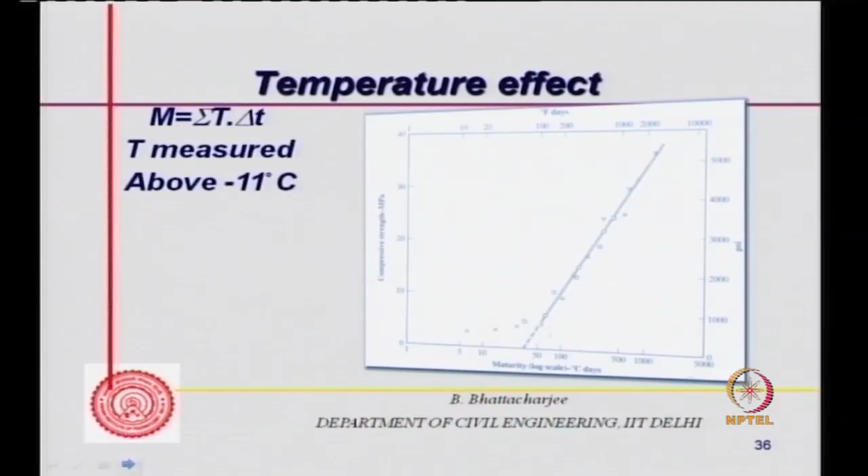What has been seen is that temperature measured, say T1 maintained for delta T1 time, T2 for delta T2 time, etc., and summing this up is what is called maturity. It has been seen that maturity, on a log scale of degree centigrade-days, versus compressive strength can be linearly related. So higher temperature for lesser time gives almost the same effect as lower temperature for a longer period.

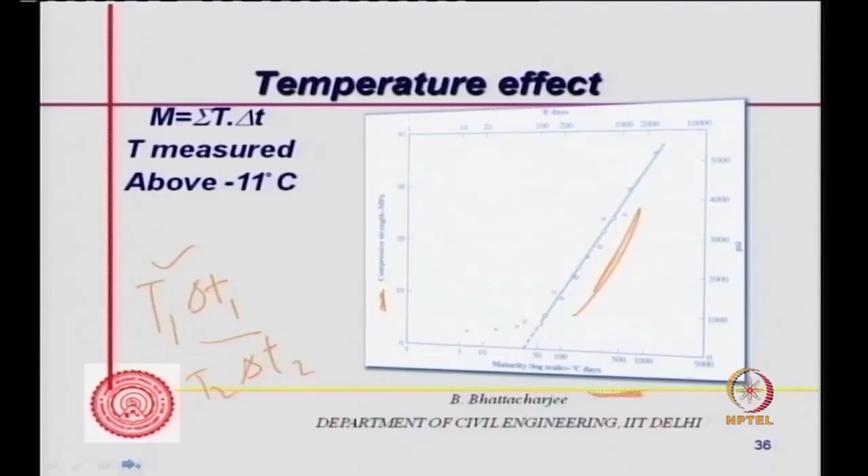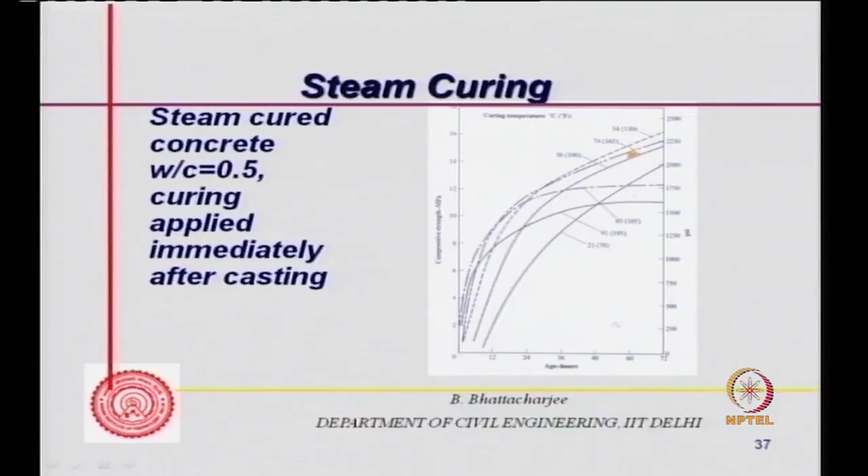That's the idea, and it gives the idea about steam curing. For steam cured concrete, if you apply steam immediately, strength gain is poor. But if you maintain it at 74 degrees centigrade, you are somewhere here on this curve; 54 degrees is somewhere there, 38 degrees somewhere there. At 91 degrees you don't get that strength gain. Compressive strength at different ages is given in hours - at 72 hours, 3 days strength, around 74 degrees centigrade gives good strength in 3 days.

If you go for very high temperature, it doesn't give very high strength. Generally, steam curing at atmospheric pressure is around 75-80 degrees centigrade. So you don't apply it immediately, because then you don't get strength gain - there is a delay period.

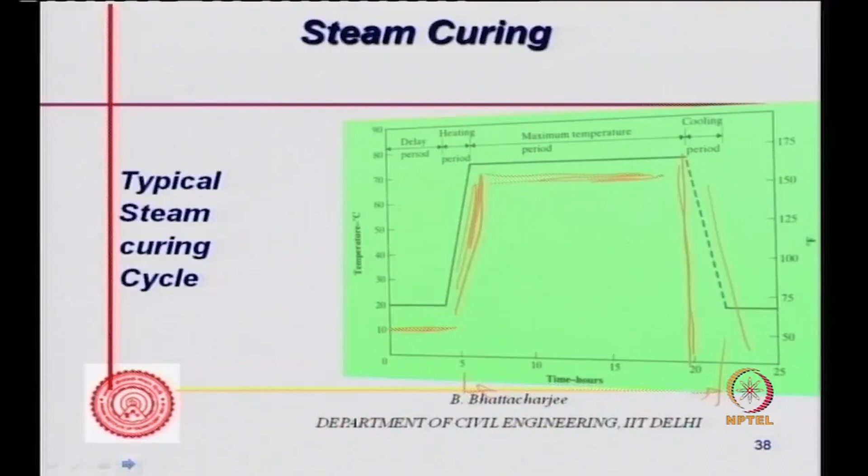Then there is a steam heating period - maintain that temperature, supply the steam, maintain it, then cool it. So basically something like 5 to 20 hours - if you do it for about 15 to 20, say 13-14 hours of steam curing, you can develop good strength. This is the kind of practice we do. So steam curing follows a typical cycle like this, used when trying to get early strength.

So you can summarize now. Basically, we have looked into all the methods of compaction and the mechanism of how compaction occurs. Lastly, we looked into curing - the methods of curing, the need for curing, and the importance of curing. That's what we have highlighted.

One thing - curing is very important from a durability purpose, which people quite often ignore. It's good for strength development, but minimum curing is absolutely essential for durability. We often ignore it because of the kind of practices followed. If sprinkled continuously in a precast factory, that will be good curing, but in situ, curing is often ignored, done by the most unskilled person. Such curing doesn't help the system - strength will be lower and durability might be affected.

Another contractual problem is that in the Indian scenario, curing is always part of concreting, so it is not a separate item, and therefore it affects strength development. That's all as the summary, and also the summary of module 5, where we have largely looked into fresh concrete issues and concrete production process. The curing completes it. Thank you very much.